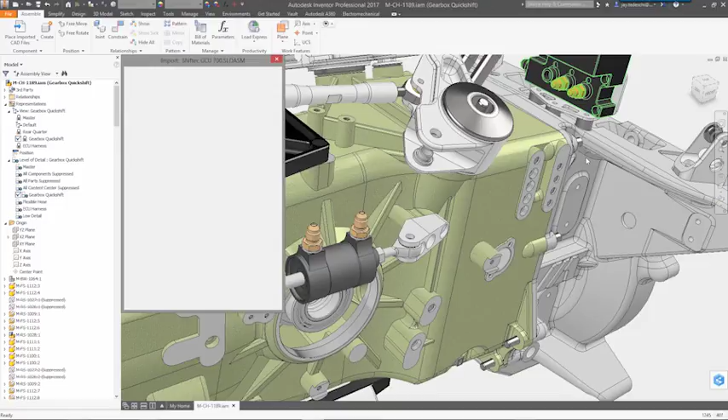Autodesk Inventor changes the way you work with non-native data. With AnyCAD technology, instead of translating files, you just open them using the reference model option. You can insert parts or subassemblies into your designs error-free while maintaining a link to the original file. Templates can be created for mapping properties from the source file to standard Inventor properties, with the ability to override or retrieve the original properties at any point.

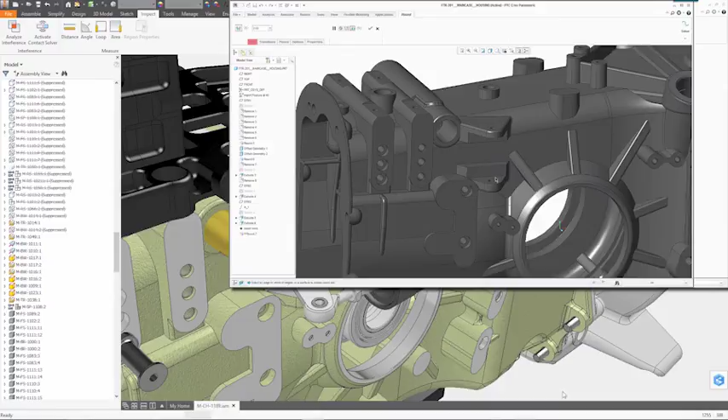And from here, you can apply constraints, build references, and even run interference checks, just as if it were a native Inventor model. But product design is an evolving process, and changes are inevitable, even for supplied components. Typically, when a translated file is changed, the outdated version is replaced in the assembly, and any constraints, properties, and component references must be manually updated. With AnyCAD technology, when you receive updated design files, the changes to the model can be updated in a single click while preserving the work you've already completed.

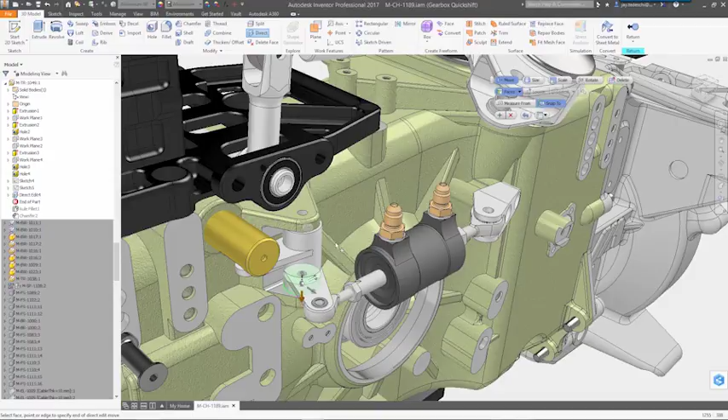There are also situations where you need to make edits to the imported model directly inside Inventor. For this, you can still accurately translate files from virtually any CAD system in use today, and then use the direct editing toolset inside Inventor to modify the design of the imported part to meet the requirements of your product.

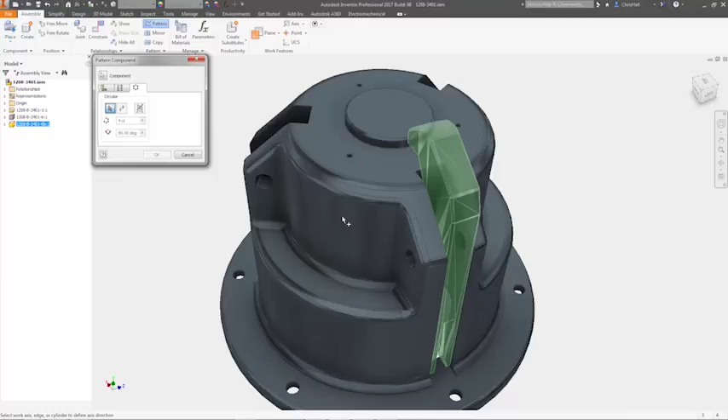Mesh geometry is increasingly used as a lightweight format for sharing information between design teams. Mesh data can be brought into Inventor assemblies and constrained and patterned similar to native geometry. Interference detection, measuring, and sectioning tools can all be used on mesh geometry to help you design parts in context. And if needed, mesh points can be projected into sketches, or clean surfaces can be fitted to groups of mesh facets, enabling you to build an editable model.

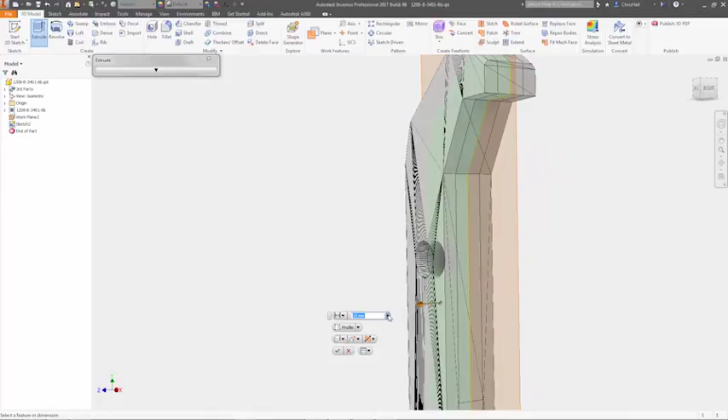Autodesk Inventor, with AnyCAD technology, error-free file translation, and mesh geometry support, makes it easier than ever for you to work with non-native data so you can work with anyone, anywhere, regardless of what CAD software they use.